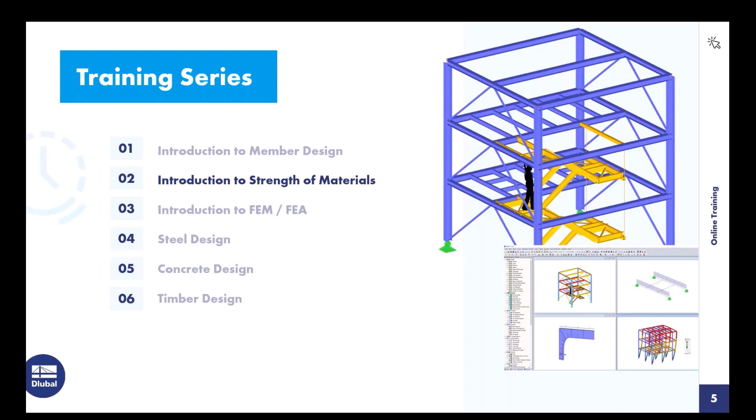This brings me to today's training program. I will first give you an introduction to the RSECTION program. Using several examples, I would like to show you the modeling options and design methods in the program. On the first example, a thin-walled I-profile is modeled with graphic functions. I will model this slowly so that you can enter this cross-section as well. In another example, I show how to insert cross-sections from the database and how you can add other parts to these cross-sections. Then I show the modeling of a massive cross-section based on a DXF template. Finally, I model a hybrid cross-section.

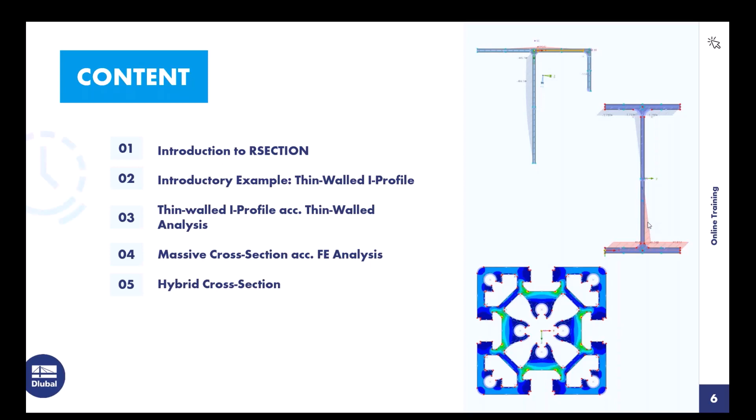RSECTION is an independently executable program for generating any thin-walled or massive profiles. If you want to design special profiles in RFEM or RSTAB that are not contained in the profile library, you can create them with RSECTION. You can then import these user-defined profiles into RFEM or RSTAB. In RSECTION, it's possible to calculate cross-section values and stresses.

The RSECTION user interface is the same as in RFEM 6 or RSTAB 9. The cross-section graphics and dialogues are displayed in the working window. Most tasks can be performed with a mouse. In the tables here below, the keyboard is primarily used for numeric input and output of results. There are 3 navigators in the left pane of the working window: the Data navigator, the Display navigator, and the Results navigator.

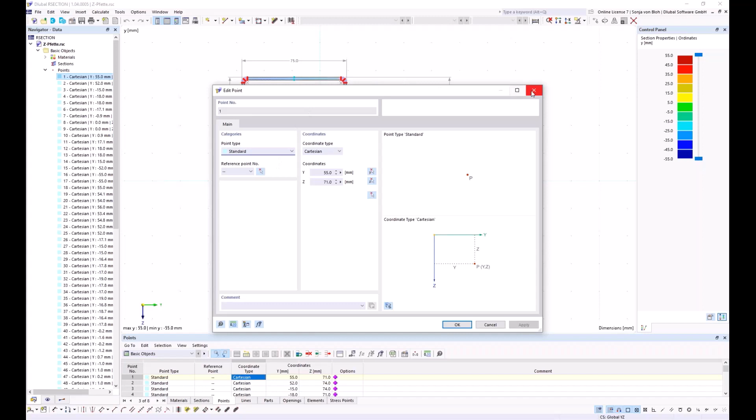The Data navigator manages the input data. A double click on an entry opens the dialog. Here, if I double click on the points, the dialog will open, and then I can modify this point. It's also possible to open the dialogs for creating new objects. If I go to points, then it's possible to add a new point here.

The Display navigator, I will turn to this, controls the graphical display in the working window. If the checkbox in front of an entry is unchecked, this object is hidden in the graphic. If I uncheck the points here, you see in the graphic, the points aren't displayed anymore. The Results navigator controls which results are displayed. You can change here between statical moments, unit stresses, and so on.

Then I would like to go into the mouse functions. To move the section, you can hold down the mouse wheel and move the section accordingly. You can turn the mouse wheel to zoom in or to zoom out, and right-click opens the context menu. You can also select objects with the mouse. If you open a window from left to right, everything that is completely within the selection area will be selected.

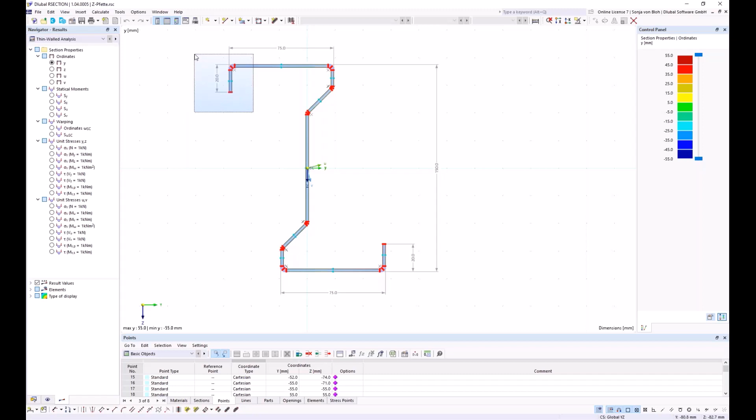If you drag a window from right to left, everything that is intersected by the selection area will be selected. You can also select individual objects. To do this, left-click on an object that you want to select. To add objects to the selection, hold down the Control key and then left-click on the next object that you want to select. To remove objects from the selection, hold down the Shift key and click on the object that

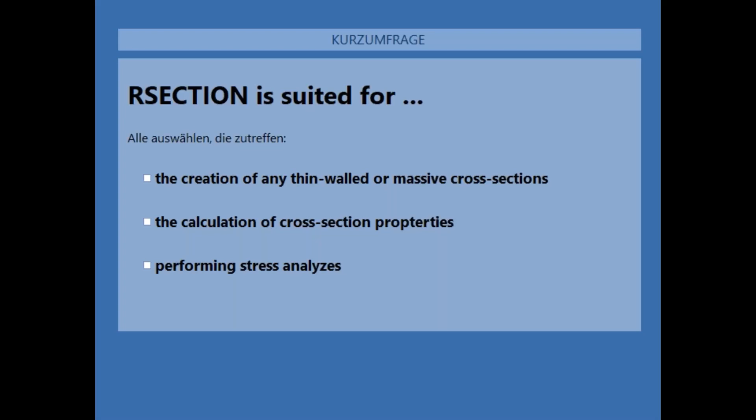you want to deselect. For the first part of the training, I am now starting a survey again. Please answer the following question about the suitability of RSECTION. I will start it now. Multiple selection is also possible. Okay, I will close the survey.

All answers are correct. RSECTION is suited for the creation of any thin-walled or massive cross-section and also for the calculation of cross-section properties and stresses.

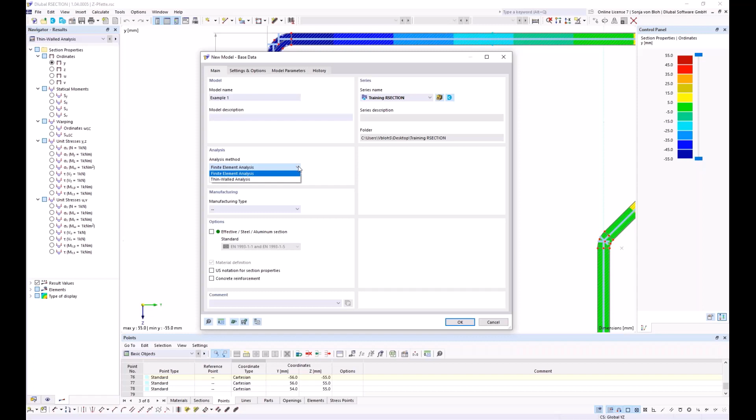This brings me to the first example. To create a custom cross-section, I open the new model window via this button here. And then I have to give the model a name, and I name it here example 1. Furthermore, the analysis method must be defined. This is here in this chapter, and the following analysis methods are available. It's the finite element analysis and the thin-walled analysis.

The effective cross-section can be calculated for both analysis methods after activating the extension here under the options. A standard must be selected according to whose rules the individual parts or the subpanels are to be generated, and the effective cross-section is to be calculated.

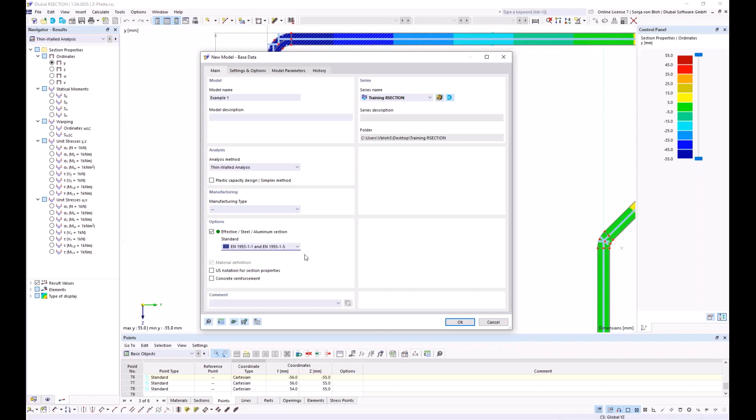The following standards are currently available. It's here the Eurocode 3 Part 1.1 for steel sections, the Eurocode 3 Part 1.3 for cold formed sections, and the Eurocode 9 for aluminum sections. I choose here the Eurocode 3 Part 1.1, and then I click on OK.

The selection of the design method or the standard is irrelevant when using the RSECTION cross-section in RFEM or RSTAB. You can select the design method in RFEM or RSTAB regardless of what is set in RSECTION. Furthermore, the subpanels are generated in the design modules based on the standard selected in the design add-on.

In the steel design add-on, the manufacturing type determines which part of the standard is used for the design. For cold formed cross sections, the standard Eurocode 3 Part 1.3 is used, and for hot rolled or welded sections, the standard Eurocode 3 Part 1.1 is used. Now the file is created.

I first define the material, and for this, I open the Edit Material window. I can create or copy another material on the list via this button. This creates a new material, and this copies the selected material. I can enter a material name here directly. RSECTION then lists all materials that match that name. If I enter here S235, then RSECTION lists all materials with that name that are within this database.

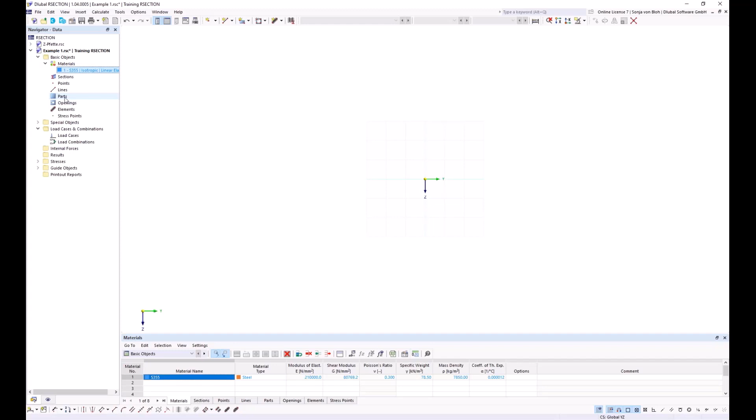The graphical input is called up via the symbol here in the toolbar, and the input via dialog is called up via the navigator data. If I go here, I can create a new element via the dialog. When creating an element with a graphical input, the points are also created. When creating an element via the dialog box, the parts and the points of the element must be created beforehand. This is why it's not possible here to call up this dialog because I haven't created the points before.

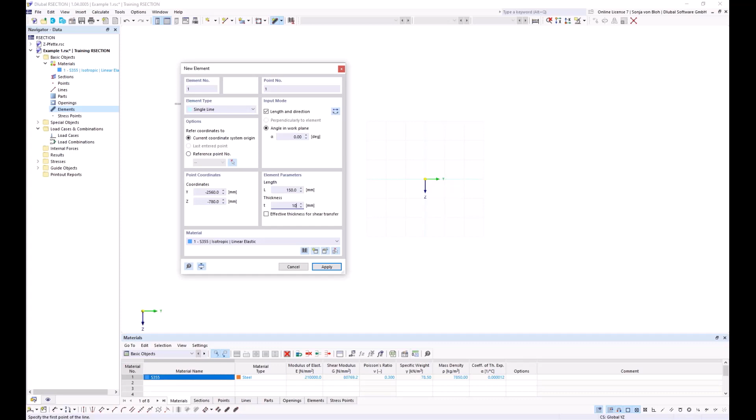I enter here the element graphically, so I use this function single line, and I enter the bottom flange here first. I choose the input mode, length, and direction, and I choose an angle on the work plane of 0 degrees, and I define for the flange a length of 150 millimeters and a thickness of 10.7 millimeters. And then I left click here on the working window.

Then I create the web. Elements must be connected for the calculation of the effective cross-section. The connection is to be made via the start and the end points of the elements. If two elements share the same points, they are connected.

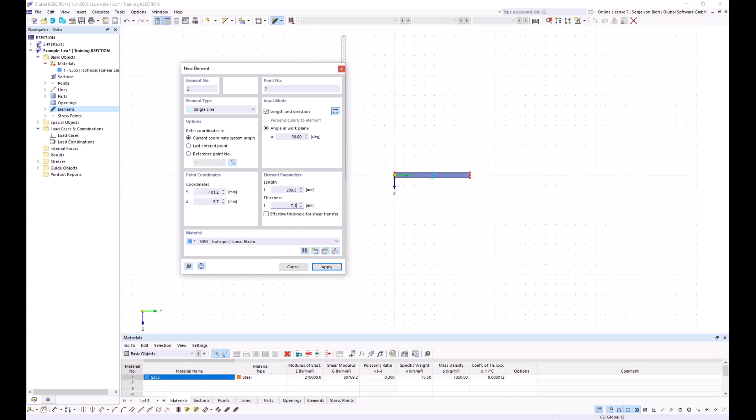For the web, I also use the input mode length and direction. And here I define an angle in the work plane of 90 degrees. And I change the direction here, and then I define the length of 289.3 millimeters and a thickness of 7.1 millimeters. And then

I create this web. Then I create the left flange, and for this I also use the input mode length and direction. Here I change the angle on the work plane. It's 0 degrees here. I change the length to 75 millimeters and the thickness to 10.7 millimeters.

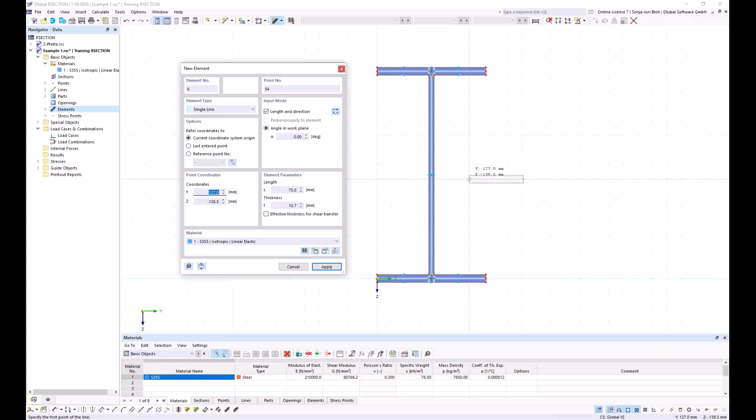Now I have to create the flange on the right side. For this, I reverse the direction, and then I create this element. I now click on the right mouse button. This closes my window. The profile should be a rolled T profile to which a lower flange is welded.

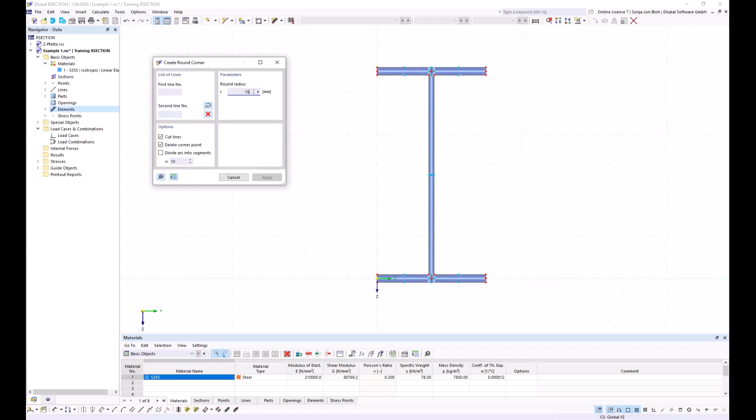The round radius is 15 millimeters. I can define lines to create them or use the create round corner function. I find this function here below, and in this dialog I have to define the round radius. This should be 15 millimeters, and then I have to click on the corresponding lines. And then I click on the right mouse button to close this window.

The lower flange is welded with a 6 millimeter double fillet weld. I create the welds using the create angled corner function. I find this here. And I have two corner types here: both edges, where I can define the length of the edges, or the corner type edge and angle, where I can define just one length and an angle. You can also calculate in the dialog.

So I define 6 multiplied by the square root of 2, and I define an angle of 45 degrees here, and then I click on the corresponding lines.

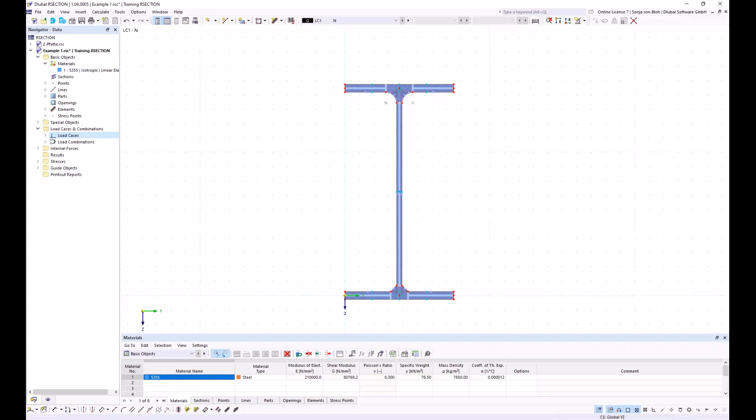Then I have to define the internal forces. The internal forces can be defined manually or imported from RSTAB or RFEM. If you want to use the import function, then you can do this via this table, internal forces, and then you can click on this button here, import internal forces from RFEM or RSTAB. I want to define the internal forces manually.

For this, I go to the navigator data, open the tree internal forces, and then double-click on internal forces. I want to define a compressive force; compressive forces are negative, tensile forces are positive. Therefore, for a compressive force, I define minus 10 kilonewtons. Then I click on apply and next, and I change the load case to load case 2. And here I want to define an axial force of 0 and a bending moment My of 100 kilonewton meters.

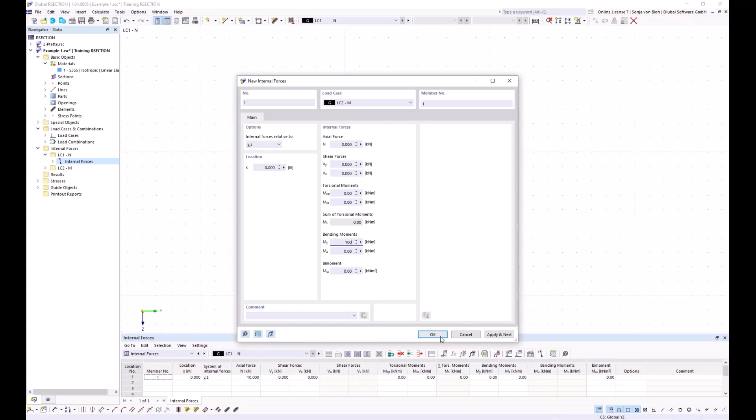And I click here on OK. The blue dots that you can see here on the graphic are the stress points. Stresses are calculated and displayed at the stress points. The stress points are generated automatically. Stress points can also be defined manually. I want to do that here.

So I go here to the navigator data again. I find here the stress points, and then I right-click on it, and then I can define here a new stress point. It's possible to define here the coordinates manually, or it's also possible to select a point in the graphic and import its coordinates.

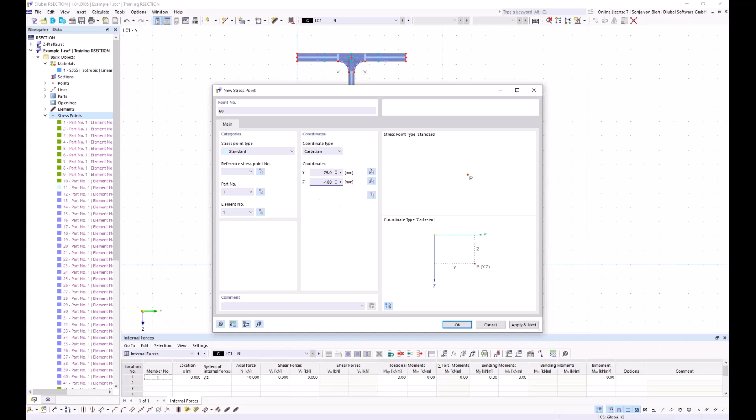I define here for the Y direction 75 millimeters, and for the Z direction -100 millimeters, and then I click on OK. This stress point is now created. If I want to find it, I can right-click on the stress point in the navigator data, and I can use this function find, and you see now the stress point is located here.

Which stresses are to be calculated and output in tabular and graphical form can be set in the stress configuration, and you find the stress configuration also in the navigator data. Here under stresses, stress configuration, if you double-click on it, then the corresponding window will open. And here via these checkboxes, you can check or uncheck the stresses that you want to calculate.

Here, these stresses are calculated, the total normal stress, and here the total shear stress, and also the equivalent stress. I don't want to calculate more stresses, so I click on OK. I'll start the calculation now. For this, I choose here in menu calculate all.

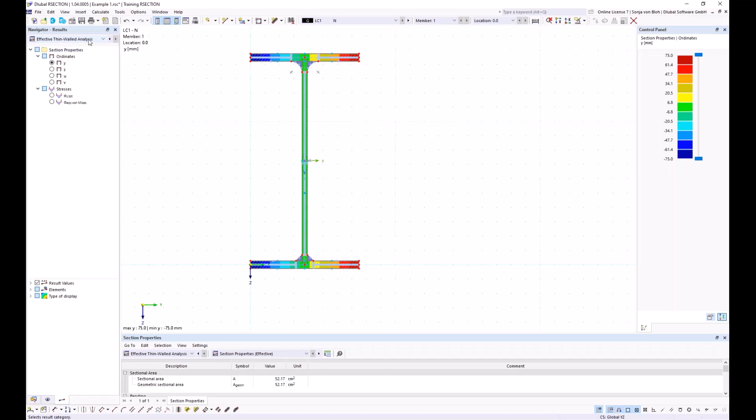In the results navigator, you can switch between the gross cross-section, this is here the thin-walled analysis, and the effective cross-section. This is here the effective thin-walled analysis. The same is possible in the result tables. Here in the result tables, you have also the possibility to switch between thin-walled analysis and effective thin-walled analysis.

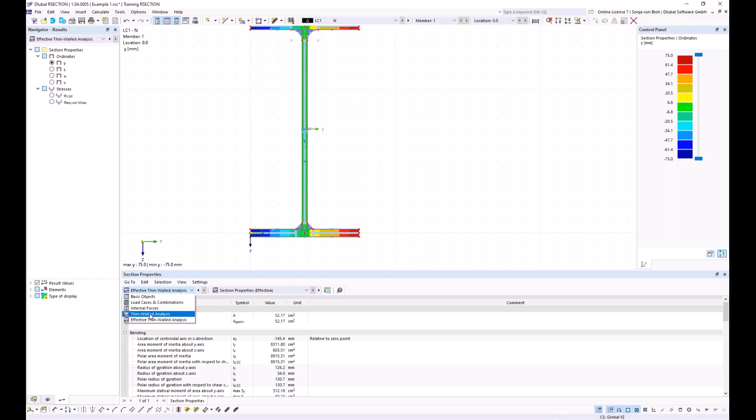Furthermore, you can switch between the results of the individual load cases, and you can also here display the stresses, and now the stresses sigma x total are shown for load case N, for load case number 1. If you want to see the stresses here for load case 2, you have to choose that load case here.

I first look at the results of the gross cross-section of load case N. The display type can be set also on the results navigator. Here you can change the type of display. I choose here off. I can see the cross-section values here for the gross cross-section.

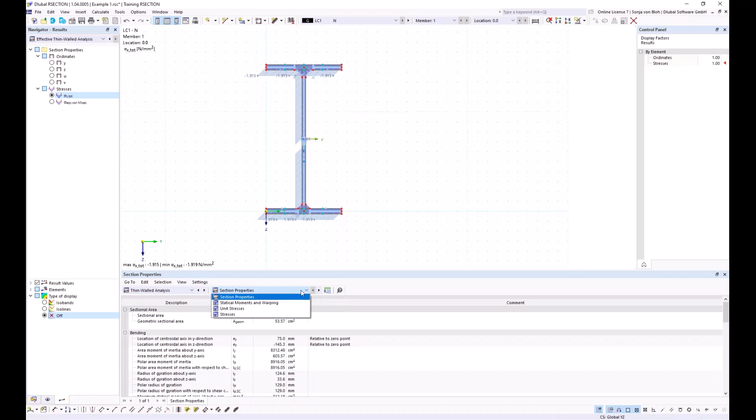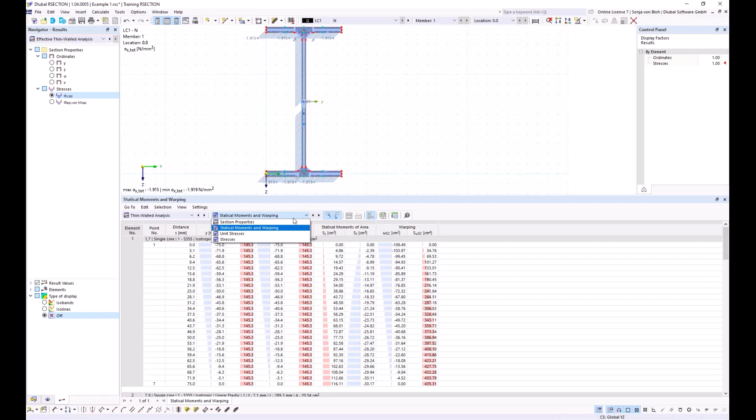If I choose here thin-walled analysis, then you can see here the section properties. The section area is calculated. Also, the area moment of inertia about Y and Z axis, and so on. Also, you can see here in the tables the statical moments, and it's also possible to see here the calculated stresses numerically.

It's also possible to show these results graphically. You can see here the statical moments, and you can see here also the stresses on the gross cross-section. If I now want to display the stresses at a specific stress point, I have to switch here to the tab All Stresses by Stress Point. And if I choose here this stress point that I have created manually, then the results of the stress point are displayed here in the table.

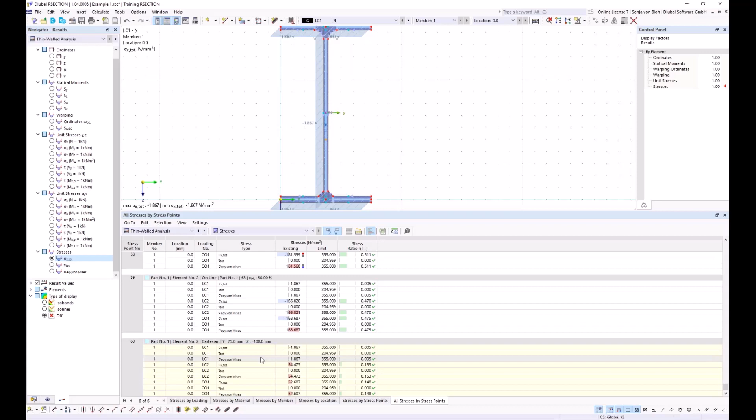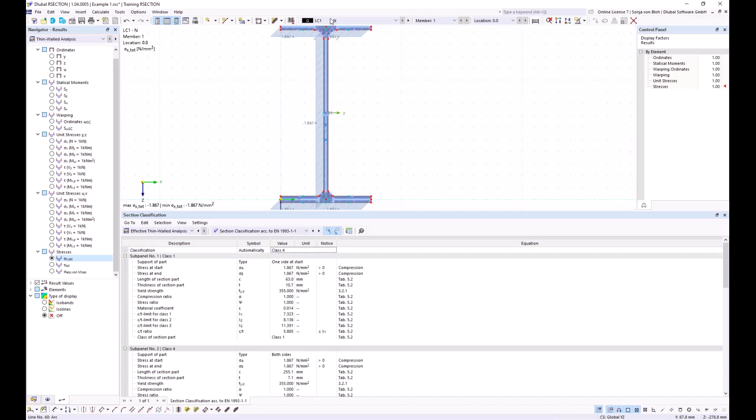In the case of the results of the effective cross-section, in addition to the results of the gross cross-section, there are also outputs for the classification of the cross-section and the effective width of the cross-section. I choose here the effective thin-walled analysis. I have here the section properties of the effective cross-section. I have here the section classification, and I see here that the section falls into class 4 for this load case axial force.

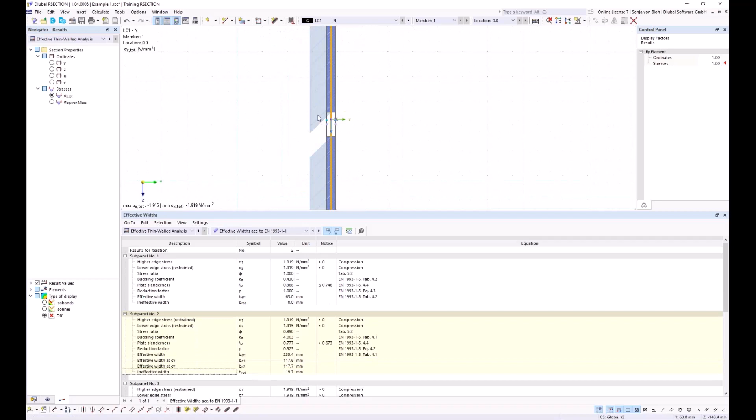Local buckling occurs in class 4 cross-sections. According to the standard, the reduction in strength due to local buckling can be taken into account through effective widths. And you can see this here in the graphic. If I change here to effective thin-walled cross-section, then here the web falls into class 4, and therefore the effective widths are calculated. Here an ineffective width of about 19.7 millimeters is calculated, and you can see here this reduction graphically.

It's also possible here to look at the results of my load case 2. Then you can see here that for my load case 2, this cross-section falls into class 1, so no reduction is made.

I'm now starting a survey again regarding the requirements for cross-section classification. I start this. Multiple selection is also possible.

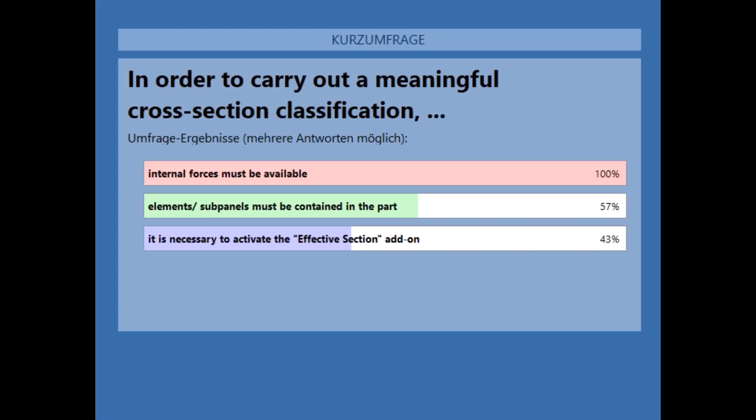Okay, I close the survey and then I share the results. All answers are correct. For a classification, internal forces must be defined, elements must be defined, and it's necessary to activate the effective section add-on.

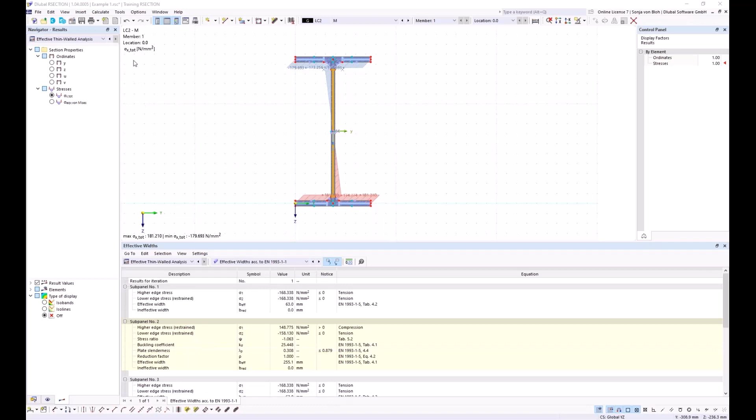I would now like to use another example to show you how you can access cross-sections from the library and modify them. For this, I create a new file. I click here on this button, New File, and I name it Example 2. I choose here the analysis method, thin-walled analysis, and I want to calculate also the effective cross-section. So I activate this checkbox again, and I choose here the Eurocode 3 part 1.1. Then I click on OK.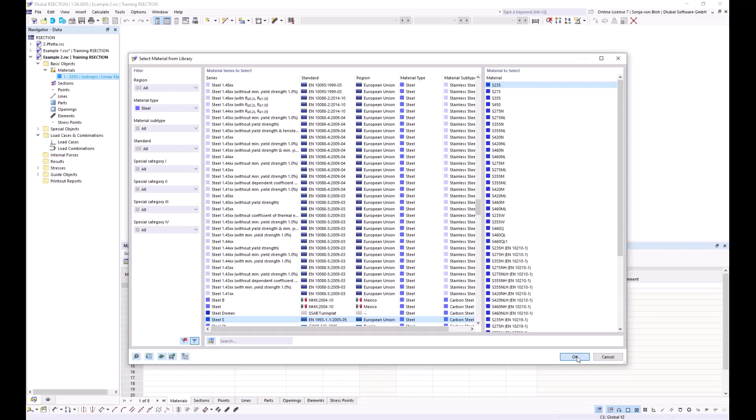Then I define the material. For this, I double-click on the material and I open the material database. And here I choose this S235. And here I click on OK. And now this material is defined.

Then I insert a cross-section from the cross-section library. To do this, I open here the new section window in the data navigator. The window is structured like the material window. A cross-section can be created or copied via the list here. You can create a new section or you can copy selected sections. I can also enter the name directly here, maybe HEB 100, and then you can see here all cross-sections with that name in the cross-section library.

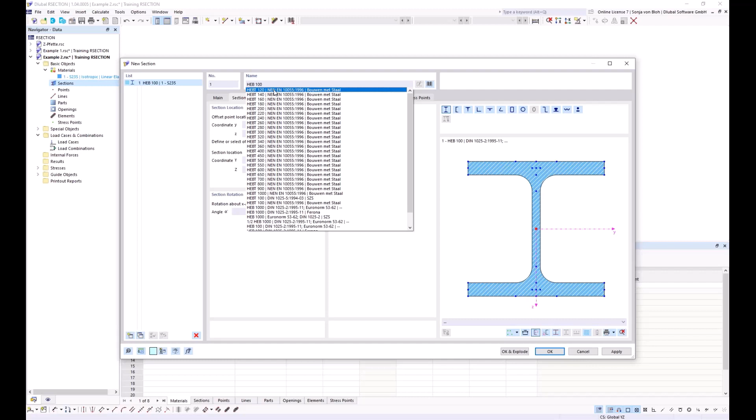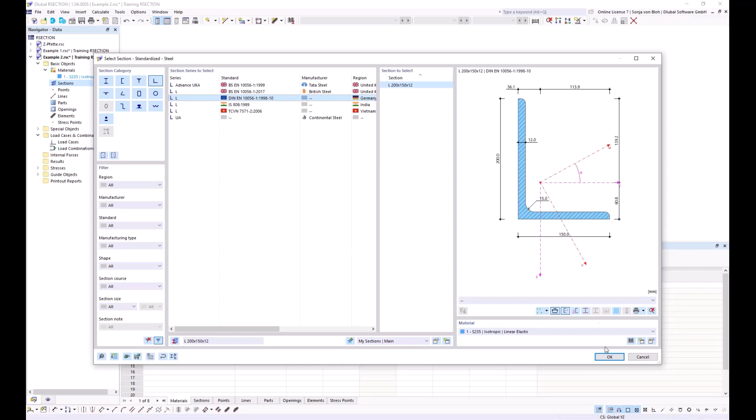And I can also open the cross-section library via this button here. A large number of cross-sections have already been entered into the cross-section library. I choose here standardized L cross-section. And in the cross-section library, like in the material library, I have filters here on the left or a search to quickly find the cross-section. I choose here an angle L 200 x 150 x 12, and I choose here this standard from DIN, and then I click here on OK.

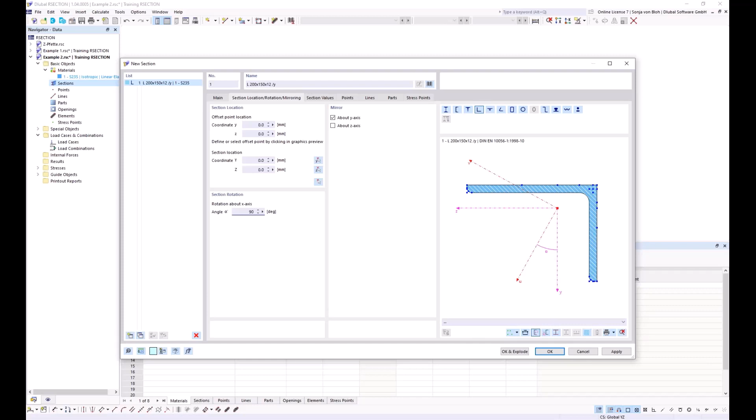The angle should be mirrored around the y-axis. That's why I activate this checkbox, and the angle should be also rotated about the x-axis by 90 degrees. So I define here 90 degrees. Furthermore, I select the offset point in the graphic, and here I select this point, and at this point the cross-section is placed at the insertion point that you can enter here. You can enter it manually, or it's also possible to pick the location in the working window. And I pick here this location, and then I click on OK.

When inserting this thin-walled cross-section, two elements are created, and also the corresponding part. The cross-section can be subsequently edited. If I double-click here, this opens the Edit Section dialog where I can change or modify here the offset point locations and so on. And it's also possible to move this cross-section or to rotate this cross-section via this function here.

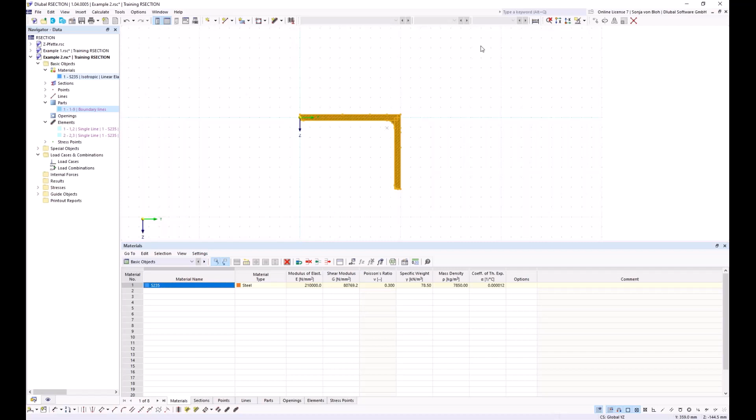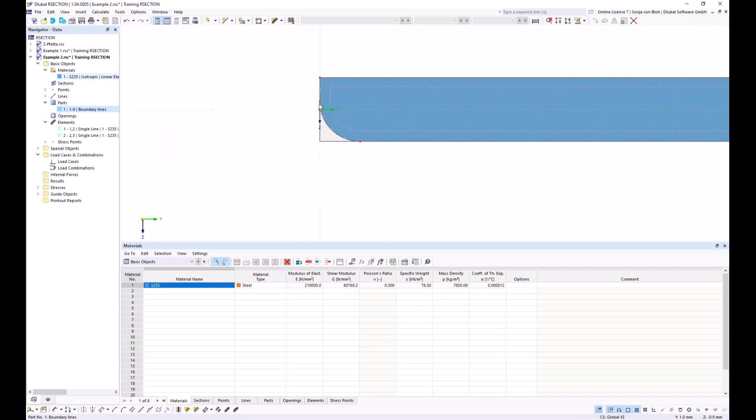However, in order to modify individual objects such as points or lines, the cross-section must be split. The cross-section is to be supplemented by further cross-section parts. I therefore split the cross-section into its individual parts, and I can do this by right-clicking on the section, and then I choose here this function explode. The fillet isn't needed, so I will delete that. I delete this point, and now the part is deleted too. Here you can see the elements are colored in red, and this means there's an error for this element. The element must lie in a part. The part is deleted, so here's an error, but I will create this part later.

I will now add more elements, and I will do this via the graphical input. So I select here a single element, and I use also the input mode length and direction. Angle in the work plane is 0 degrees, and I define here a length of 200 millimeters and a thickness of 12 millimeters. Now the direction must be changed, so I click here on reverse orientation, and then I click here on this point.

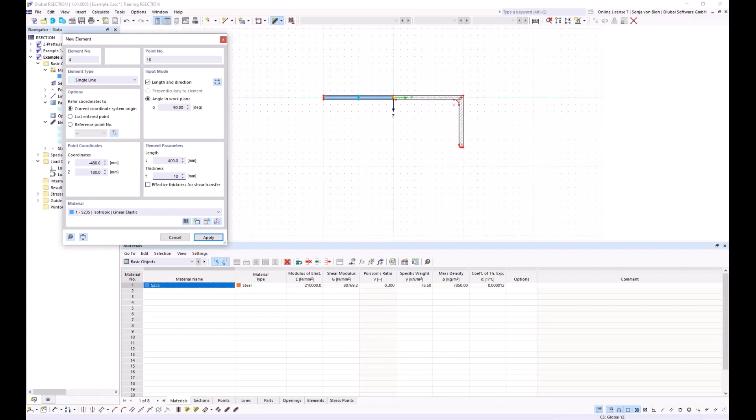Another element for the web should be created. To do this, I use also the input mode length and direction. Here I define an angle of 90 degrees, and I have to reverse the orientation, and the length should be 400 millimeters and the thickness 10 millimeters. And then I click here on this point. I delete unnecessary lines. For this, I click with my left mouse button on this line, and then I click on delete. And I will do this with this line also. I select it, then I click on delete.

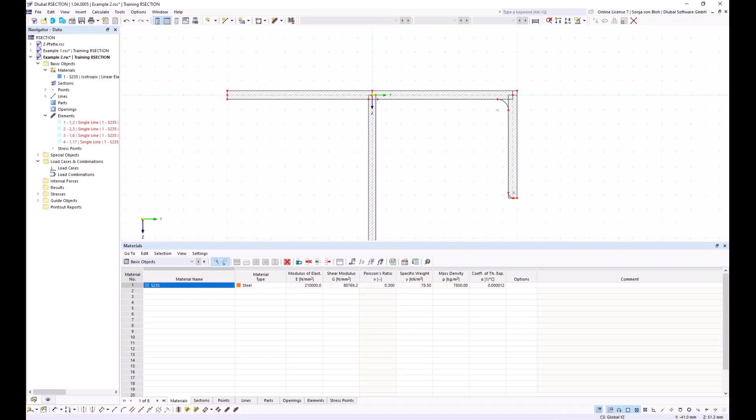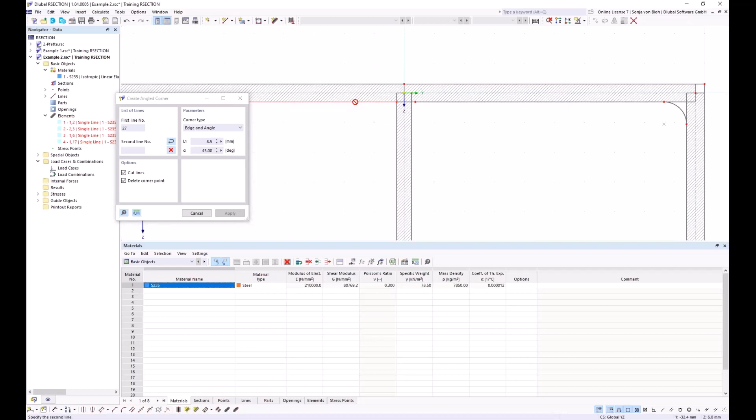Welding seams should be also taken into account in the cross-section properties. I create the weld using the angled corner function. So I open this dialog again. I choose the corner type, edge and angle, and a 6 millimeter double fillet weld is to be defined, so I define here 6 multiplied by square root of 2, and I define here an angle of 45 degrees, and then I click on the corresponding lines.

Furthermore, I still have to create the part, and I will do this using a function I can find here: select boundary. For the new part, I have to define a material. This should be the created material S235. Then I click OK, click on a line, and the part is created. The cross section is now complete.

I would now like to calculate the effective cross section and the stresses, so I create load cases and internal forces. I create the load cases first. For this, I go to the navigator data and choose new load case. I name this load case N, and I create another load case via this button, create new load case, and name it load case M.

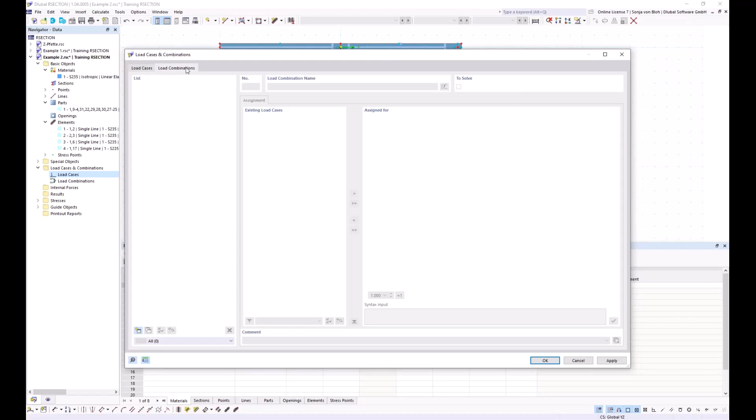I also create a load combination. For this, I go to the tab load combinations and click on this button, create new load combination, and then I add all load cases to my load combination. Then I click OK.

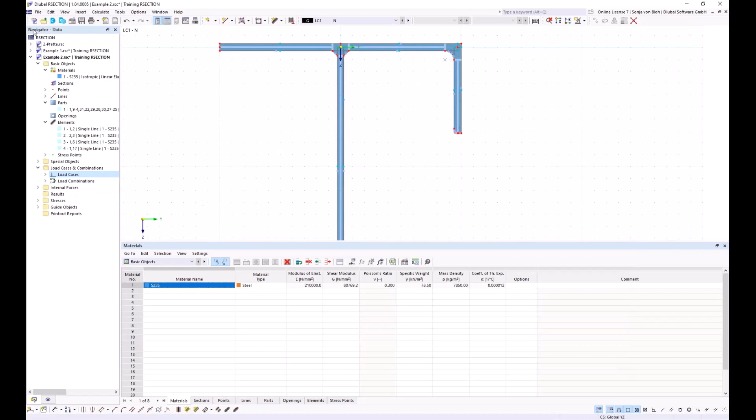Then I have to define the internal forces. To do this, I go to the navigator data, open internal forces, and then I define here an axial force of minus 50 kilonewton. I click apply and next.

I change the load case to load case 2. I define here an axial force of 0 kilonewton and a bending moment of 20 kilonewton meter. And then I click OK.

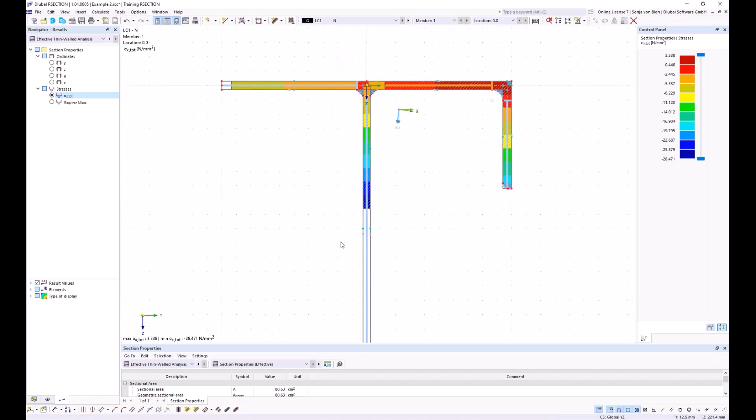Then I start the calculation. I choose calculate all, and I look at my effective cross-section. This cross-section falls in load case 1, also in class 4. I can see the reduction here, and also in the tables. I can see the section classification, class 4, and the effective width here for this sub-panel.

I also want to create a printout report, and I will do this via the navigator data. You find the printout reports below, and then I click on new printout report. Then I have to check the report items that I want to add into my printout report. I don't want to see the stresses by material or by member, or location and stress points. And then I click on Save and Show.

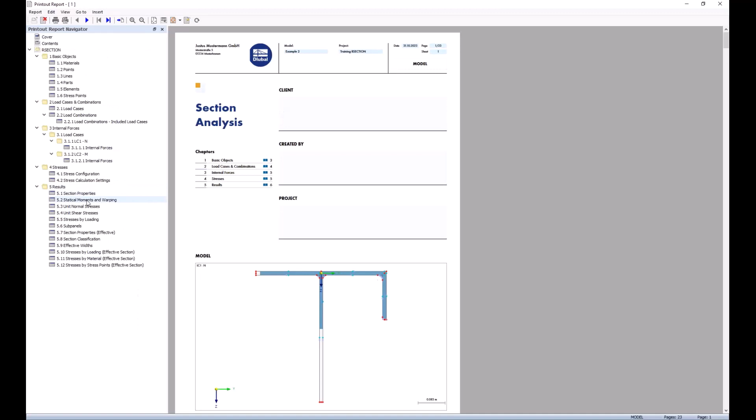Now the printout report will be created. I can see here the numerical results. It's also possible to add graphics to the printout report.

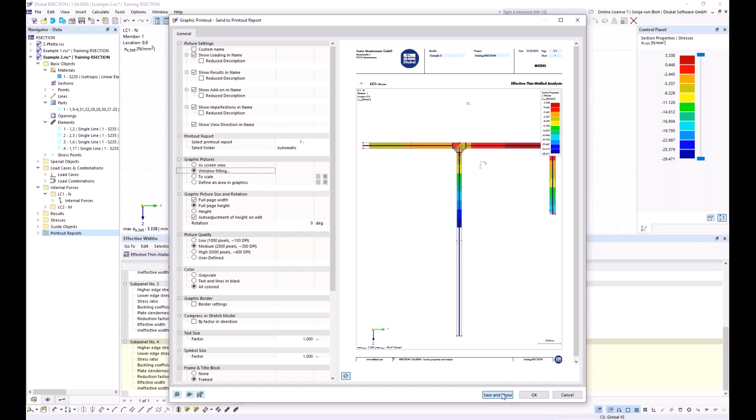To do this, I hide this printout report and use this function, print graphics to the printout report. In this window, it's possible to define the size of the graphic. Here I choose a window filling. I can see the preview now, and if it's okay, I click on Save and Show. Now this graphic is added to the printout report.

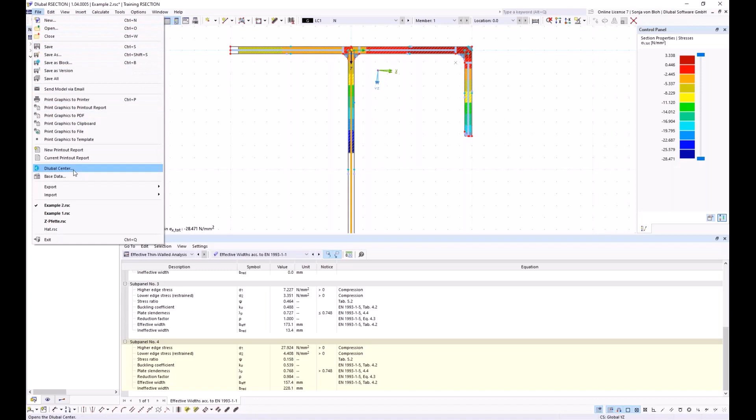In the next example, I would like to show you that you can also create cross-sections by importing a DXF file. A DXF file can be imported via menu File, Import DXF. Then I have to choose the corresponding DXF file, and then I click on Open.

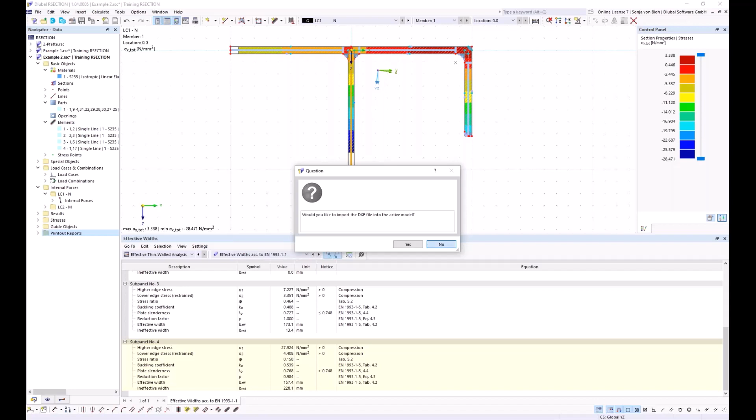I don't want to import the DXF file into the active model. I want to create a new one, so I click on No. And then a new window opens.

In the section Create a Section Model, you have 3 options for creating the cross-section. The automatic creation of elements is useful if the outlines of the cross-sections are available in the DXF file. RSECTION attempts to create center lines for parallel lines and then set the elements between the intersections. Only elements that do not exceed the maximum thickness that you can define here are created.

The import function use DXF template lines as center lines is useful if the cross-section geometry is available as a center line model. The lines of the DXF template are considered as the center lines of the elements. The thickness defined in the field T is assigned equally to all elements.

The function create DXF template is useful for massive cross-sections where no elements need to be created. In addition, this function can also be used for complex cross-sections where I only want to create elements for the decisive cross-section parts. With these import functions, the lines in the DXF file are imported as lines.

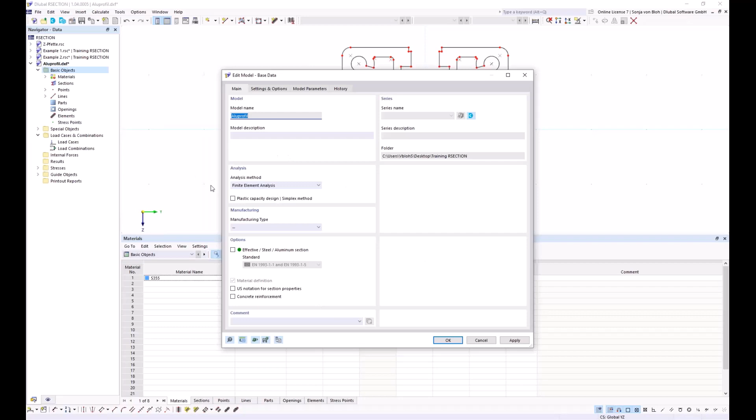A finite element analysis is to be carried out. To do this, I go to the base data and choose the analysis method: finite element analysis. This should be performed on massive cross-sections, such as timber or concrete cross-sections, in contrast to thin-walled cross-sections, where stresses can be regarded as constant across the thickness. The stress distribution in solid cross-sections is variable, and this can only be determined with a finite element analysis. So I choose this analysis method now, and click on OK.

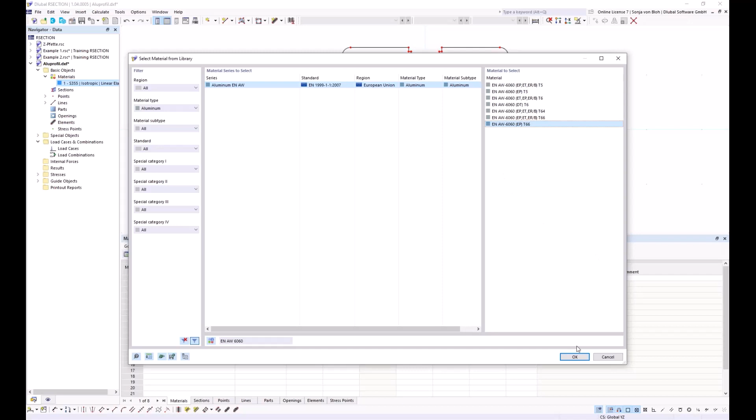Then I have to define the material. I modify the created material, which should be aluminum. I open the material library, change the filter to aluminum, use the search function, and define a material: EN AW-6060. I choose this material at the bottom, then click on OK.

In a finite element analysis, only a surface needs to be defined, meaning only the part, but no elements. I would only need to define elements if I also want to calculate the effective cross-section or carry out a classification. So I only create the part here, using the function select boundary. I click on OK, then click on a boundary line, and now the part is created.

I still need to create the openings. I create the openings using a function I find here, select boundary, and then click on the boundary. I can create the other openings by rotating them.

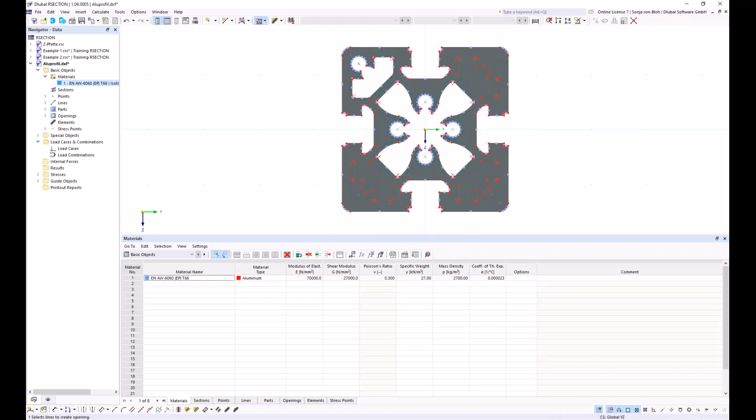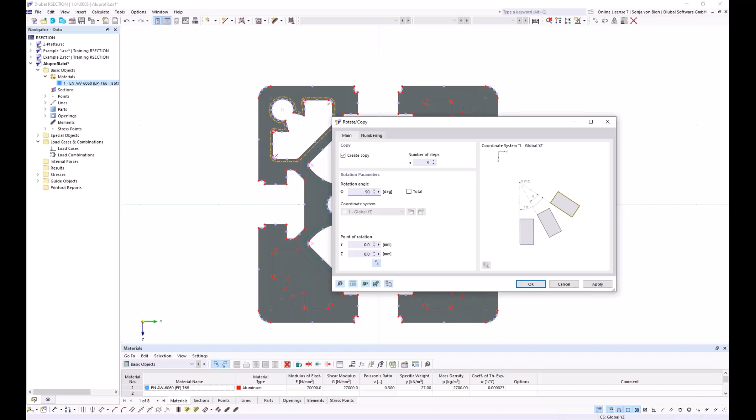I want to show you this. First I have to select the opening that I want to rotate, then select the function rotate selected objects. I want to create a copy, and I want to create 3 copies, so I define a number of steps of 3, and the rotation angle should be 90 degrees. Then I have to define the point of rotation, which I can also pick in the window. If I click on OK, the openings will be created.

I want to calculate the stresses here as well, so I create load cases. For this, I go to the navigator data again, right click, and choose new load case. I define a load case N, and also a load case MT. Then I click on OK.

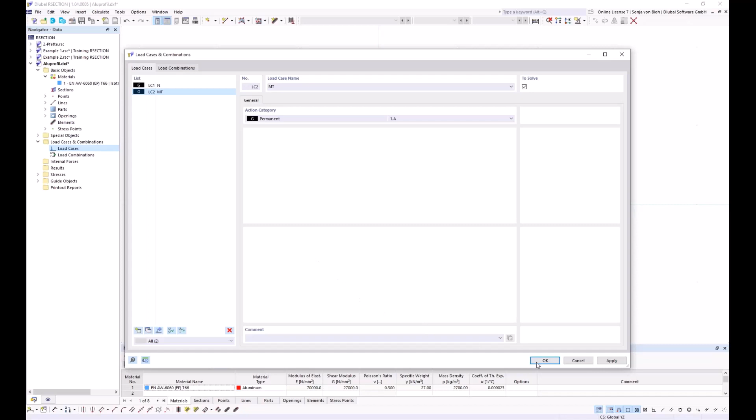Then I define the internal forces, again via the navigator data. I open the internal forces dialog and define an axial force of minus 10 kilonewton in load case 1, click apply and next. Then I go to load case 2, and here I define a torsional moment of 0.3 kilonewton meter, and click on OK.

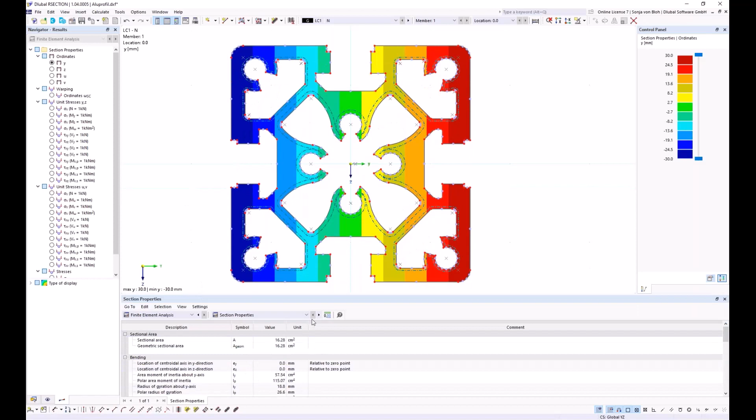Then I start the calculation via the menu calculate all, and now the finite element analysis is carried out. I have here the section properties, the stresses in tabular form, and I can also see the stresses graphically. If I choose, for example, sigma x or tau total, I have to change to load case number 2, and now you see the results graphically.

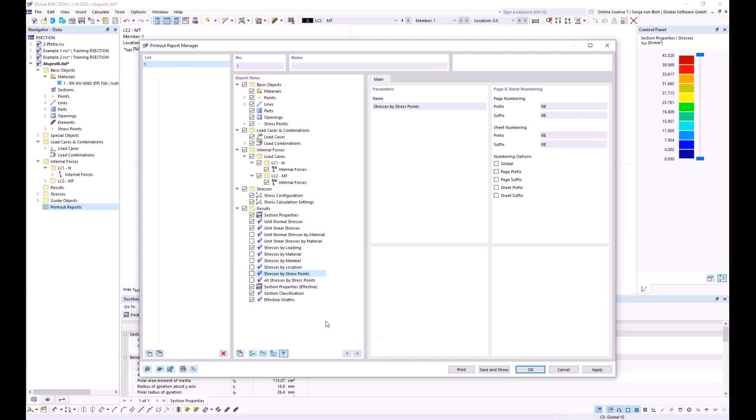I want to create a printout report for this. I go to navigator data again, right click on printout report, and choose new printout report. Here I choose the report items. I don't want to see the stresses by material, member, location, stress points, and so on. Then I click on Save and Show, and the printout report is generated.

I want to also add a graphic to this printout report, so I go to this function, print graphics to printout report. This should be window filling. Then I click on Save and Show, and now this graphic is also added to the printout report.

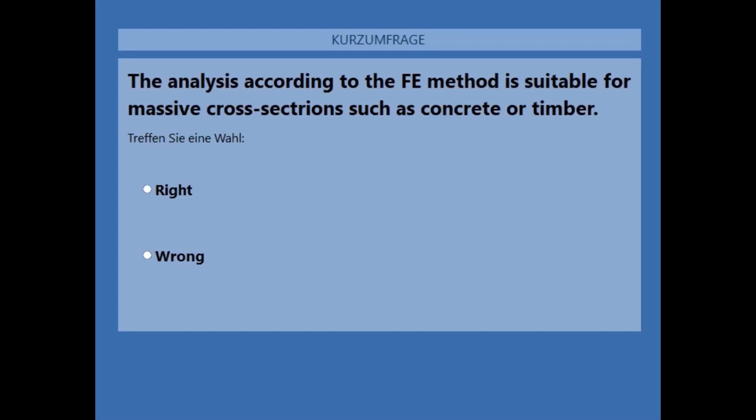Nearly all of you have answered this question, so I'll share the results. The correct answer is that the finite element method is suitable for the calculation of massive cross-sections. Most of you gave the correct answer.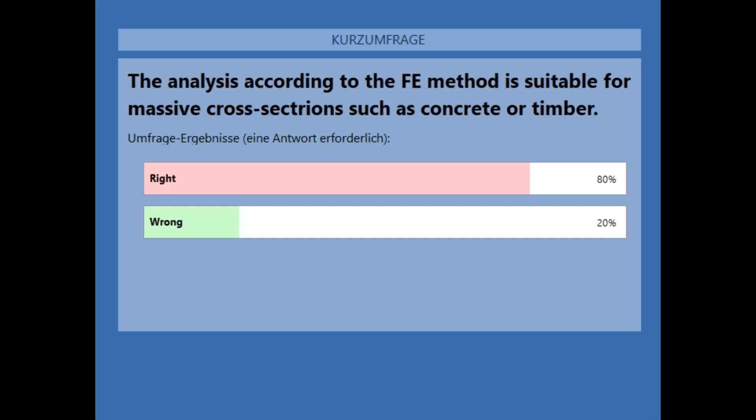As a last example, I show the modeling of a composite cross-section. In RSECTION, it's also possible to model cross-sections that consist of different materials. Ideal cross-section values are determined for such a cross-section. A 1000 millimeter wide and 200 millimeter high concrete cross-section lying on an HEB steel cross-section is modeled in this example.

For this, I create a new file and name it example 4. I choose the analysis method finite element analysis, and then I click OK.

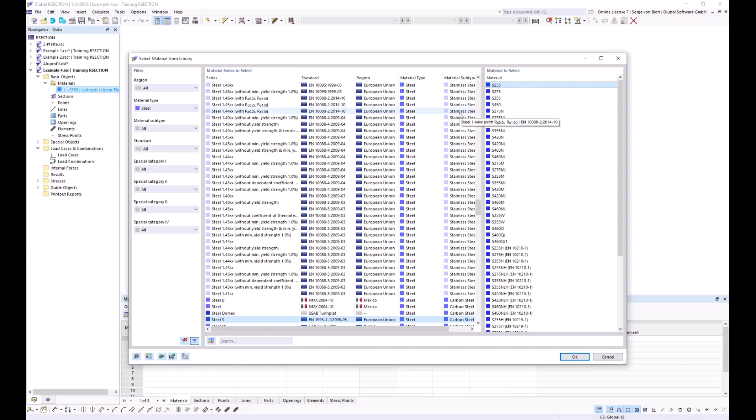I define two materials. For this, I open the material window, and for the first material I define a steel material. This should be an S235. I open the material library and choose the S235 material, and I add a new material, a second material, to the list. I will do this via the button create new material.

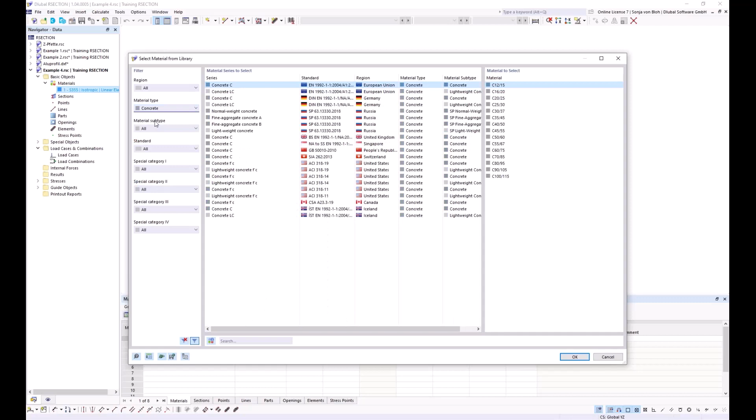Then I open the material library again. I choose the material type concrete, and here I want to choose a C40/50 material. Then I click OK, and also OK.

The first material is always the reference material. In RSTAB or RFEM, however, I have the option of defining other materials. First, I model the concrete cross-section with a dimension of 1000 by 200 millimeter, and I will do this via section.

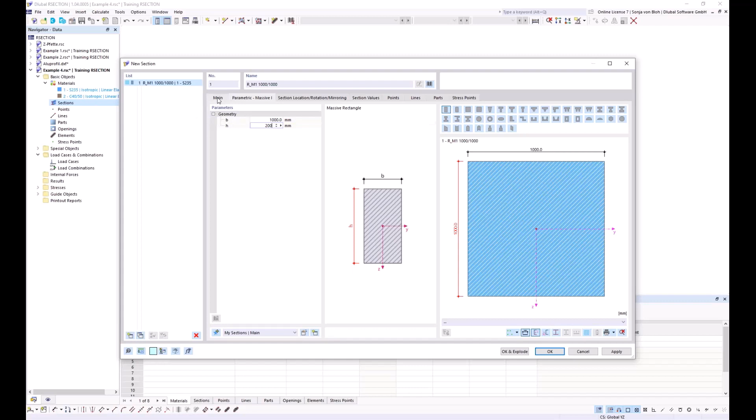So I go to Navigator Data, New Section. Then I open the section library, and I choose a massive rectangle cross-section. Then I define for B 1000 millimeter, and for H 200 millimeter, and I define the concrete material for this. Then I click OK.

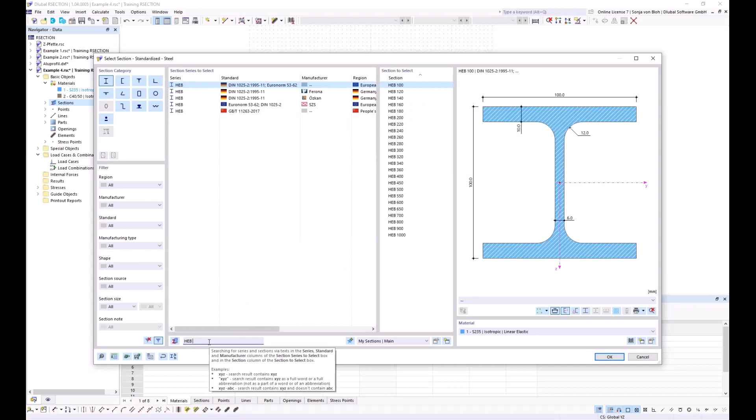Now this cross-section is inserted into the file, and I create a second cross-section. For this, I go to Navigator Data again, New Section. This should be the steel cross-section. I open the section library again. I choose I-beams, H-beams, and I define an HEB 400. I choose this one, and I choose the material S235.

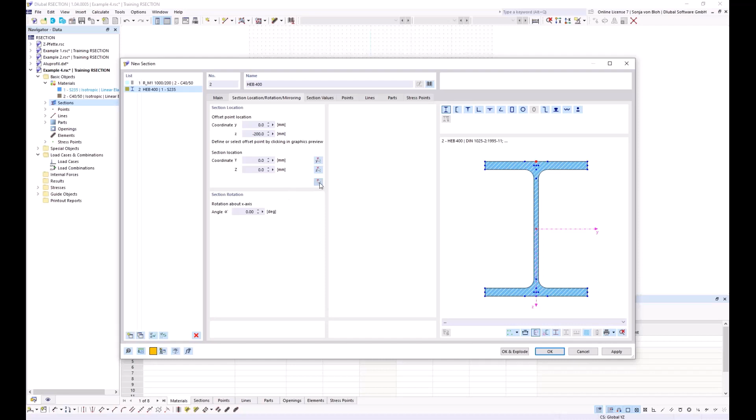I click OK, and I choose the center of the top flange as the offset point. So I click on this point in the graphics, and I choose the section location here at the bottom of the concrete rectangle. Then I click OK.

I want to calculate also the stresses, and for this I create a new load case. I go to Navigator Data, new load case, and I define the load case name M. I click OK, and in load case M I define a bending moment about the y-axis of 100 kilonewton meter. I now start the calculation.

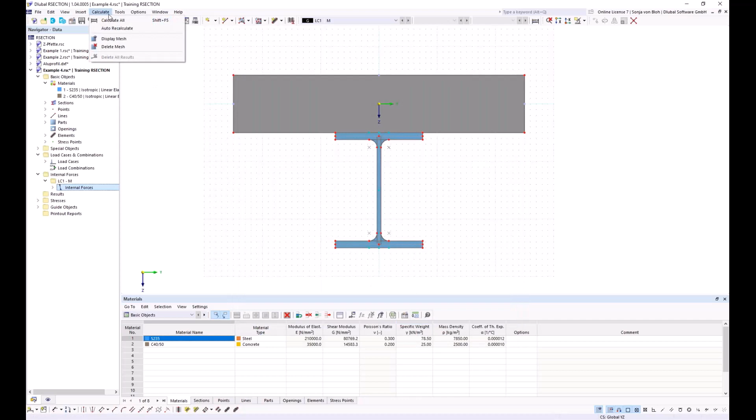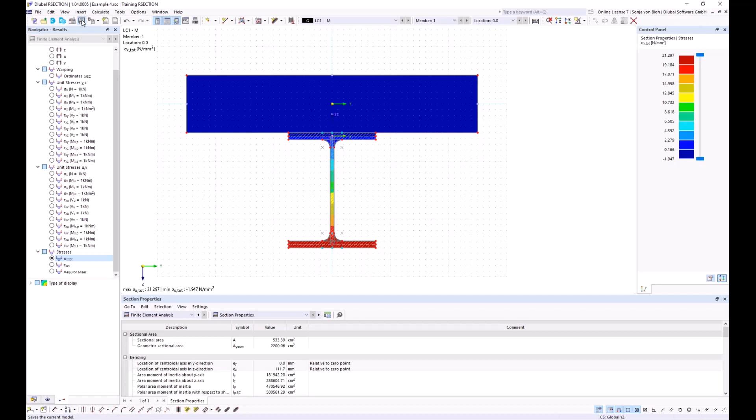I can see here now the stresses, and I would also like to show you how to import the cross-section into RFEM. To do this, I first save the cross-section, and I now open RFEM 6, and I create a new file. I name it example 1, and then I click OK. Then the new file will be created.

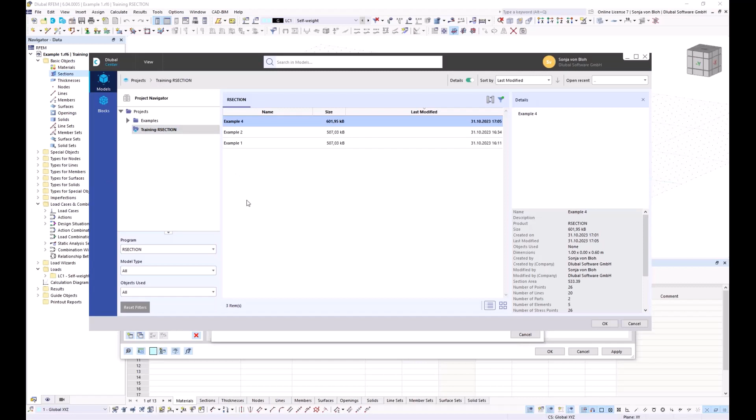I import the RSECTION cross-section into this file first. For this, I go to Navigator Data, right-click on Sections, New Section, and then I open the section library, where I have the possibility to import a section from RSECTION. I click on this button, and this opens the Dlubal Center. And in the Dlubal Center, I choose this example 4. I click OK.

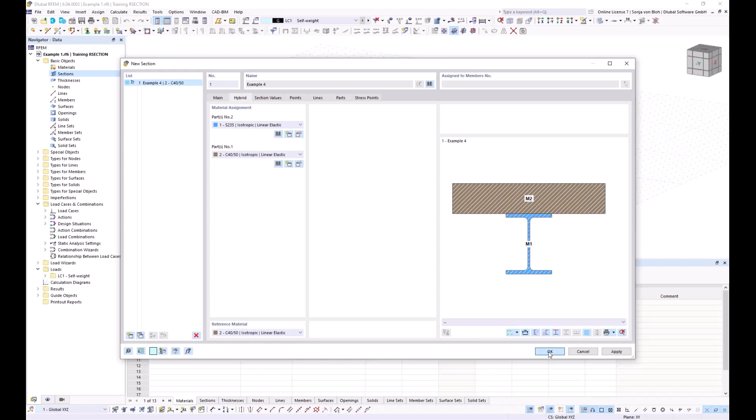And now this cross-section is available in RFEM 6. I have here also the tab Hybrid, and here you can see the material assignment. If you want to, you can also change the materials for the parts 1 and 2, and it's also possible to change the reference material.

It's also possible to create a member with this cross-section. To do this, I click on New Single Member. Then in tab Section, I choose this cross-section, my example 4, and then I create this member.

With this example, I have come to the end of the training. It was taught how you can create general cross-sections with graphic functions, how you can add cross-section parts to database profiles and create profiles based on a DXF import, and also how to create hybrid cross-sections.

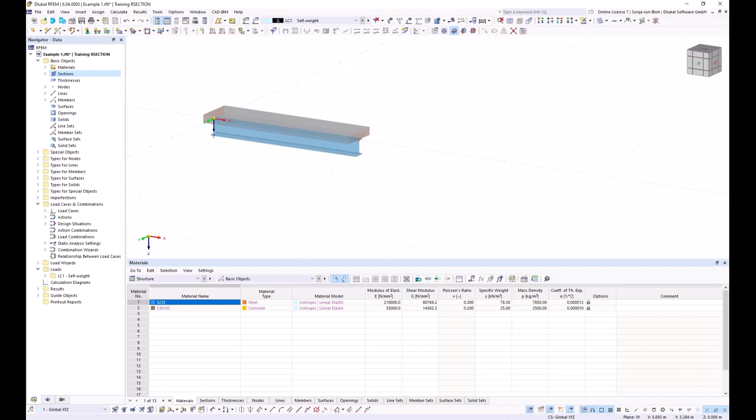Finally, I would like to show you where you can find more information on our website. You will find in tab Support and Learning frequently asked questions. You can also find knowledge base articles, news and events, and our webinars.